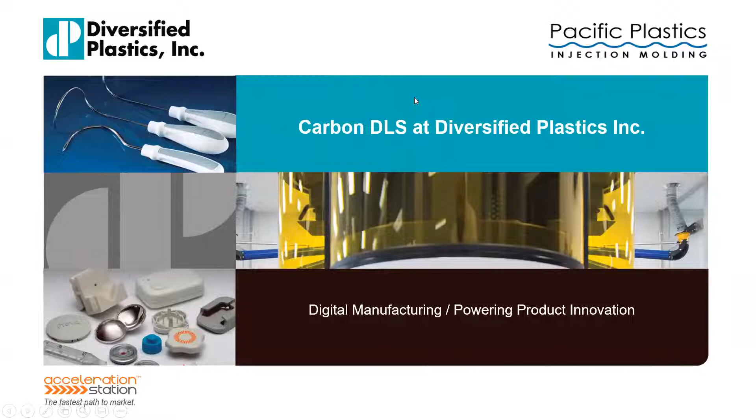Gonna let the music go through here. There we go. So thank you.

What you're going to hear today is, as Steve alluded to, our specific carbon technologies that we've incorporated into a part of our business called Acceleration Station. You're going to hear a little bit from me, and then the vast majority of the content is going to be from AJ Frizzell, our technical support engineer, who really is driving things within the Acceleration Station using carbon technology. So I'm going to cover just a couple of quick things regarding DPI just to lay the groundwork, and then AJ will take it from there.

So AJ, if you could go to the next slide.

A little bit about Diversified. Steve alluded to a Minnesota-based company. We're a custom injection molder. We have two facilities, one in Brooklyn Park here, and then through an acquisition, a facility of another custom molder in Vista, California, near San Diego. You can see on screen almost 80,000 square feet between the two facilities, with clean room technology in our Minnesota facilities.

Also certification with ISO 9001, 13485, FDA, et cetera. And even though medical is a large part of our business, we participate in a number of other industries. The other thing we like to highlight is that Diversified is an ESOP, so employees own 100% of the company. In Minnesota there tends to be a higher predominance of ESOPs, but it's still a unique structure. It's been an ESOP since 2011, and the employees definitely have a piece of the pie, and that does make a difference.

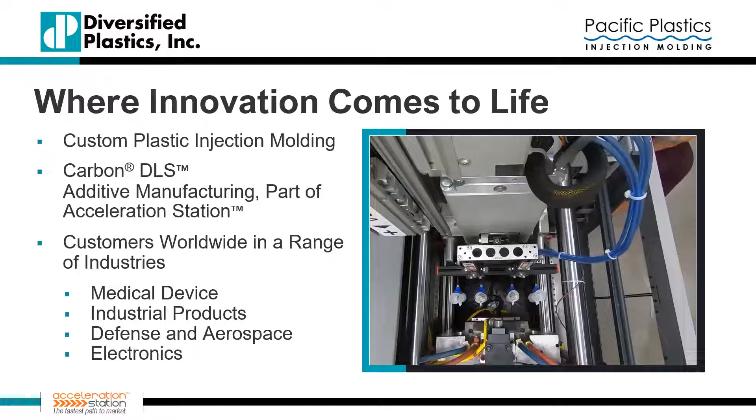As I said, medical device is our primary sector, but we are very involved in a number of industrial sectors, as well as aerospace, defense, and electronics. The next slide is going to be a quick video of Diversified Plastics, and after that AJ will pick up and take you through the carbon DLS technology specifically. So thanks.

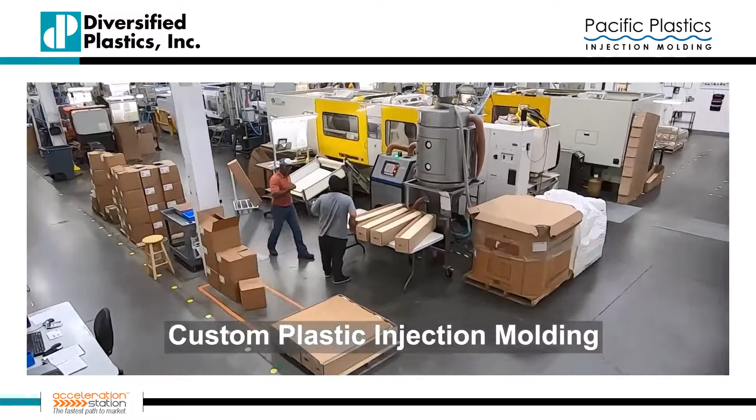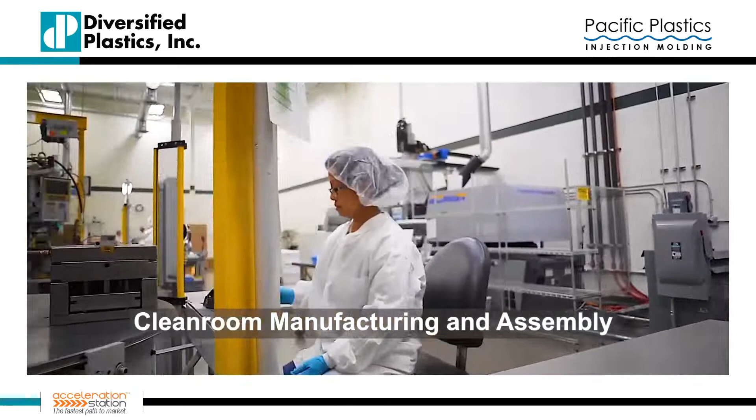All right, thank you Kevin, and hello everybody. My name is AJ Frizzell, technical support engineer here at Diversified Plastics. I'm going to give a brief overview of our relationship with Carbon and then move into the technology, and we'll end with a live demo in our lab here.

At the end of 2018, DPI became the first plastic injection molder to join the carbon production network. Most recently, Carbon awarded us with the distinction of being one of their premier partners. Carbon DLS, our carbon digital light synthesis additive manufacturing, is a cornerstone of our acceleration station, which provides customers with the fastest path to market.

In addition to DLS, our acceleration station services include design for additive manufacturing, inspection under our stringent quality system, clean room assembling and packaging, as well as lot traceability.

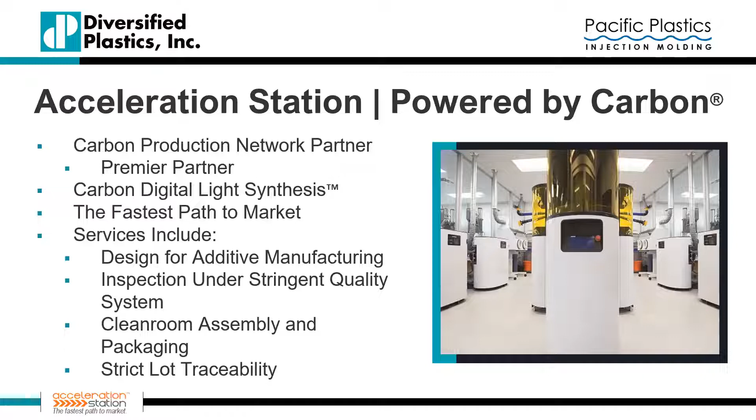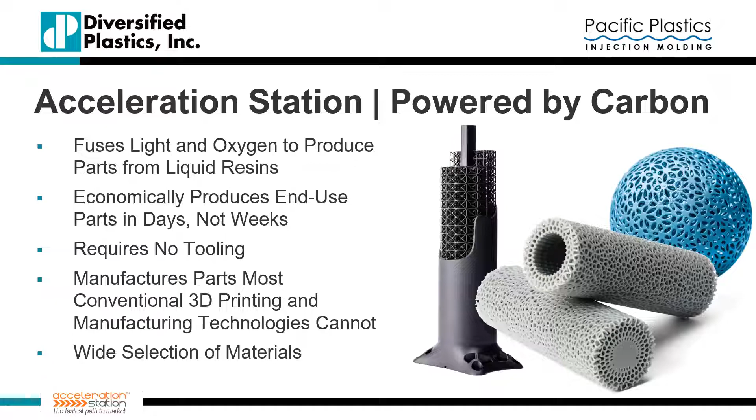Before we dive into design for additive manufacturing, I'm going to provide some information on the carbon digital light synthesis process. Carbon DLS fuses light and oxygen to produce parts from liquid resins. It economically produces end-use parts in days instead of weeks. The carbon DLS process requires no tooling and manufactures parts that most conventional 3D printing and manufacturing technologies cannot. Using this technology, parts can be manufactured from a wide selection of materials. I have another video coming up which will show the carbon DLS manufacturing in action and provide an overview of its benefits.

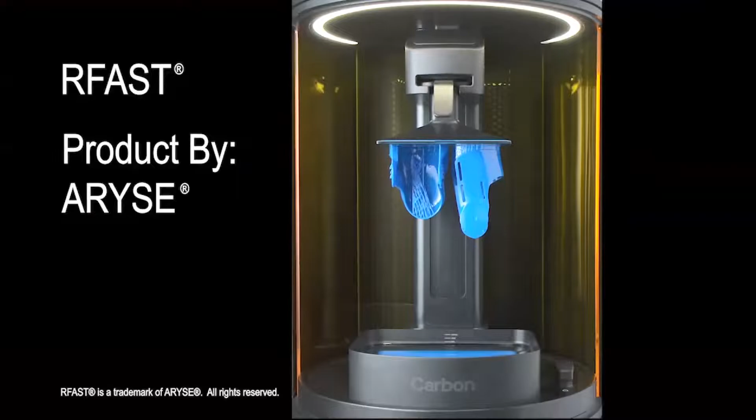Now that you hopefully have a little understanding of the carbon DLS additive manufacturing process, I always like to discuss additive manufacturing design and how it relates to carbon DLS. Not all parts are ideal for the carbon DLS process or traditional 3D manufacturing. Many parts are better suited for manufacturing using plastic injection molding and other conventional manufacturing methods.

But some of the things carbon DLS really excels at is consolidating components together. We can take an assembly and fuse it down into one part, which really helps with assembly time and the actual manufacturing of many different parts. Because carbon DLS eliminates the need for tooling, the process from design to production of end-use parts is much faster and more economical. And it allows rapid prototyping, faster design iterations, with multiple revisions of the same part being printed at the same time, so we can really compare the different rev levels of parts.

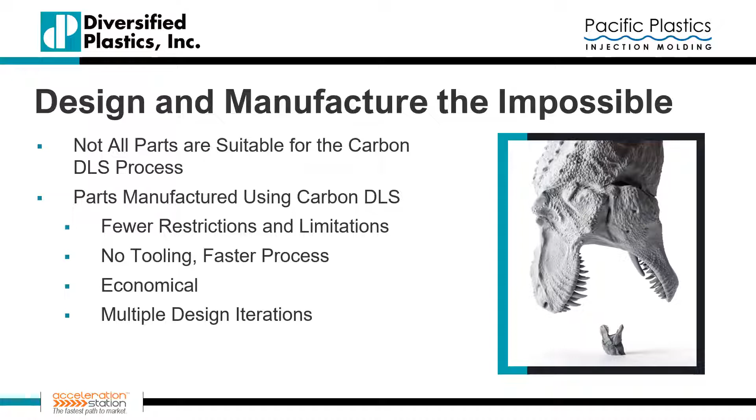Available for decades, traditional 3D printing allows engineers to design more complex geometries. However, high volume and end-use part production has not been practical due to slow printing speeds and limited material selection. Additionally, most 3D printed parts are built in layers that must adhere to one another during printing, and under specific thermal stress and part orientation, these layers may fail, separate, or fail entirely.

And that's where carbon DLS really excels. We can produce complex lattices, we can do surface textures. We really have a lot of differentiation from traditional FDM manufacturing.

And this technology really isn't just for prototyping. It delivers small to large volume production of end-use parts using a wide range of materials with diverse mechanical properties. And thanks to the design flexibility of carbon, engineers are also able to boost quality, strength, stiffness, heat dissipation, and performance.

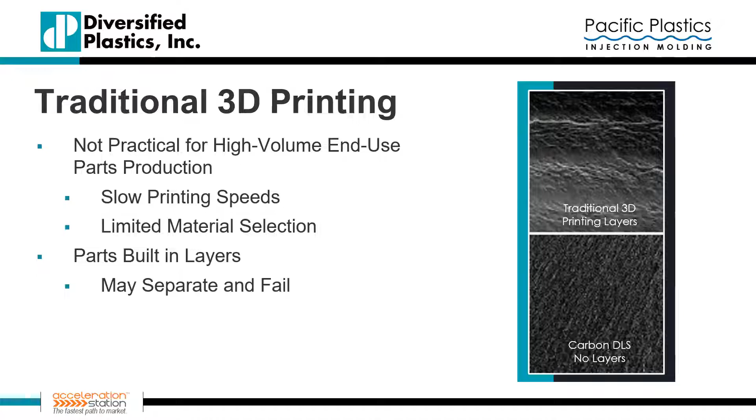This process is much faster than the traditional FDM printing process.

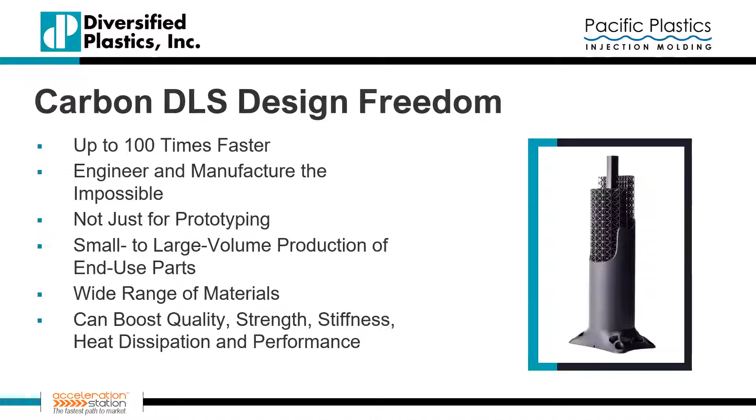We really excel at our material selection. We have about 12 to 16 resins that we get directly from carbon that range from elastomeric to fully rigid. That's really what's driving a lot of our projects — customers focus on a specific material and then move on from there, because we can hit some really unique characteristics, and also hit similar material characteristics to injection molding.

So using carbon 3D printing, we really feel that the design of a part is the most important aspect that allows us to use this technology to its full power.

We use CAD on our injection molding side, but using the power of SolidWorks and putting a full assembly into one STL file, we can print that entire assembly in one part through carbon DLS instead of printing a bunch of specific parts at a similar time.

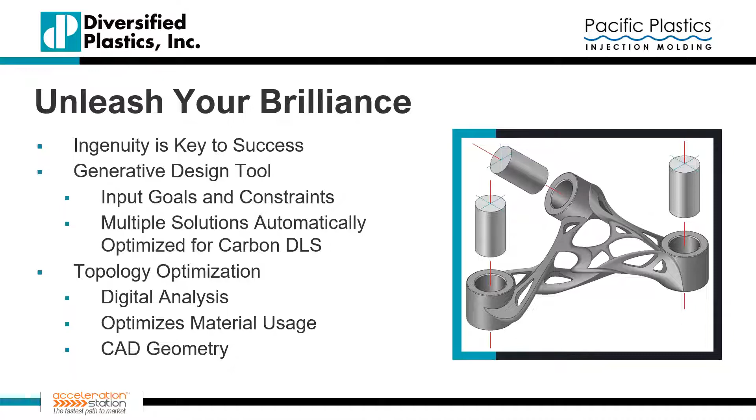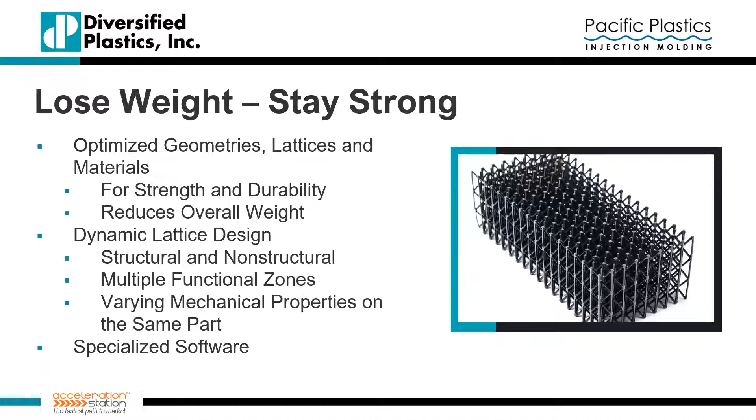We also utilize lattice technology to limit part weight and material consumption. We find that we can hit a lot of the same stiffness and strength capabilities while vastly minimizing the amount of material needed.

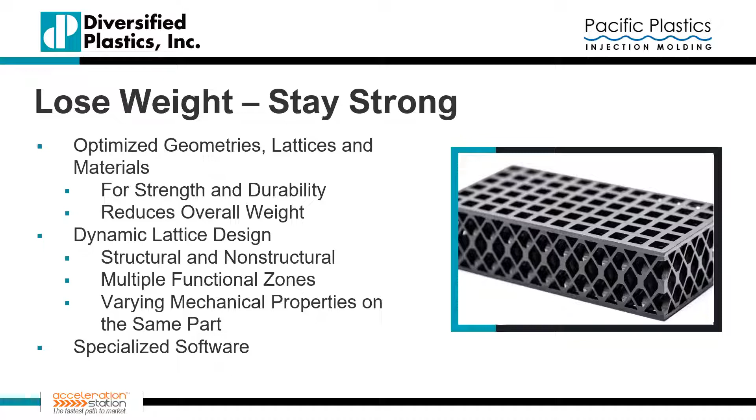And due to our manufacturing process, which I'll get into a little later, the less weight of a part actually increases the print speed layer by layer. That's something carbon DLS really excels at, and another aspect that traditional FDM printing can't hold up to.

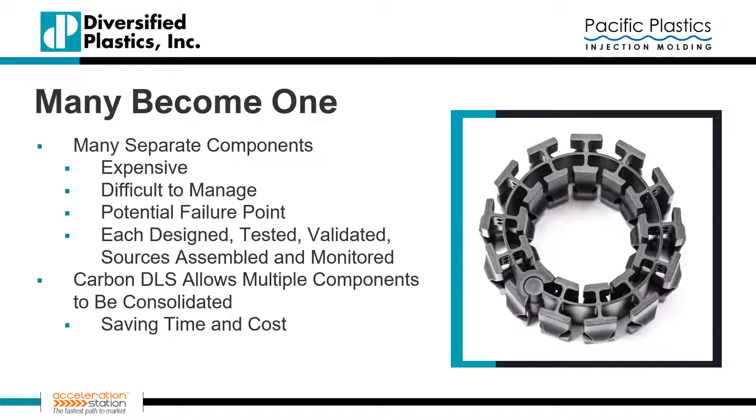A new feature we've been experimenting with a lot in the last year is our texturing ability. We're able to create and recreate some really unique textures on the flat and curved surfaces of our parts. We're finding that people usually spend a lot of time and money putting these textures on molds, but we can do 10 iterations of a single texture, flip back and forth, and find exactly what our customer is looking for.

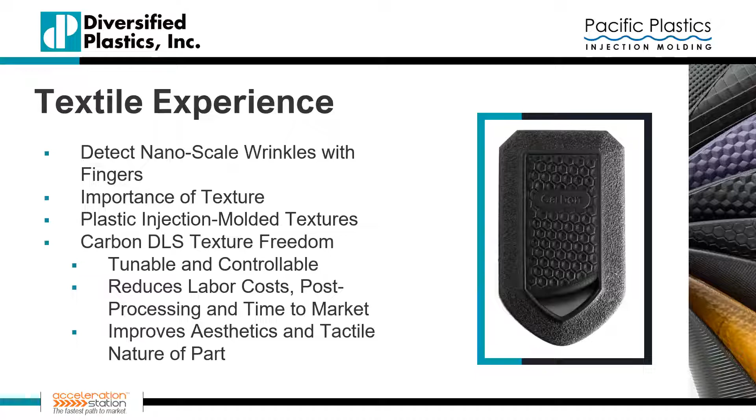Carbon DLS technology does not require molds, which allows for a lot of heavily customized parts. In addition to texturing, we can add serial numbers, which allow us to maintain traceability during intensive prototyping jobs. We can run a serial number through 1,000 different parts, and once that goes into our quality department, we can maintain traceability and inspect all these parts individually.

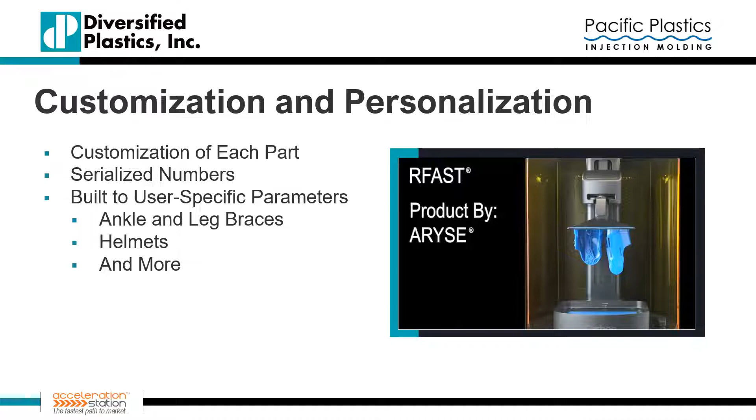I would like to finish up with a case study of a really exciting project that we're working on with Thaddeus Medical Systems.

Thaddeus improves patient care with its iCooler, an active, smart, cold chain packaging solution. The iCooler delivers reliable transport of temperature-sensitive medical supplies and specimens, such as expensive biological therapies, vaccines, blood, and tissue samples. Part of its resilient construction, the iCooler contains design-patented gyroid lattice structures manufactured with DPI's acceleration station, powered by carbon DLS. Here are two pictures of those gyroid lattice structures.

The gyroid lattice components minimize vibration and shock while maximizing airflow in the payload, battery, and sensitive electronic compartments. We found that this exact geometry actually limits a couple different frequencies of vibration, and we're finding lots of practical uses for that.

During prototyping, the Thaddeus team found that the complex lattice was impossible to manufacture with traditional 3D printing methods, and Diversified Plastics was the only supplier to successfully produce gyroid lattice parts. We printed samples with different lattice sizes and material options, and found that this SIL 30 material, one of our cache of materials, hit everything that they needed for performance.

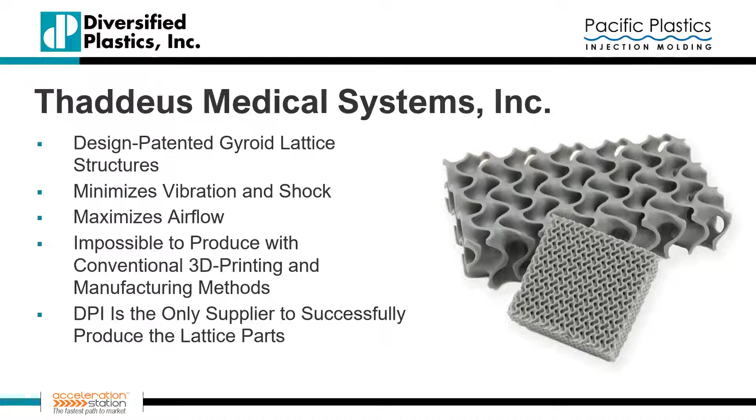This cooler will be initially available in 2 sizes and has a substantial market potential, and they're actively in beta testing right now with a couple of various institutions.

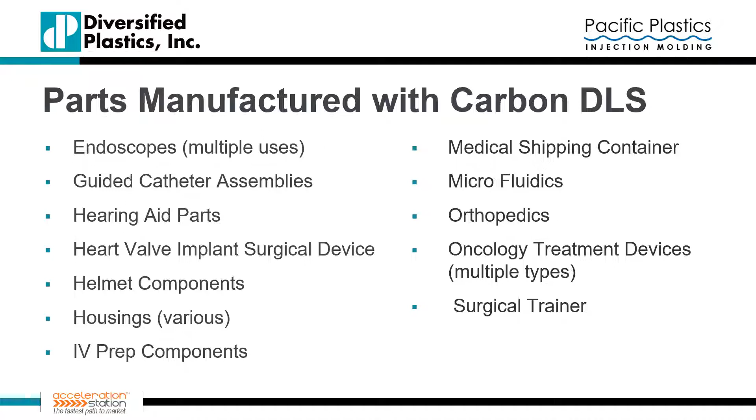So these are some examples of parts that we're currently working on or have worked on, and it's really up to a designer's imagination how to utilize this technology. Additive manufacturing has been around for 20 years, but I really believe we're still scratching the surface on finding all the unique uses for this technology, because we aren't limited by the normal limitations of manufacturing.

All right, so I'm going to start my video here and show you guys our acceleration station lab in Diversified Plastics. All right, I'm going to stop sharing as well here too, which should make my screen bigger. Hello, everybody.

All right, so we're in the acceleration station lab here. We have a circular workflow of how we go through the steps to use these carbon 3D printers. First step behind me here is our dispensing station. The resin comes in cartridges, either 1-to-1 or 5-to-1 resins, except for one resin that we have. So they have to be dispensed properly through a mixing straw, as you can see here, which throughout the length of the straw, the 2 resins mix together and then form our in-use resin.

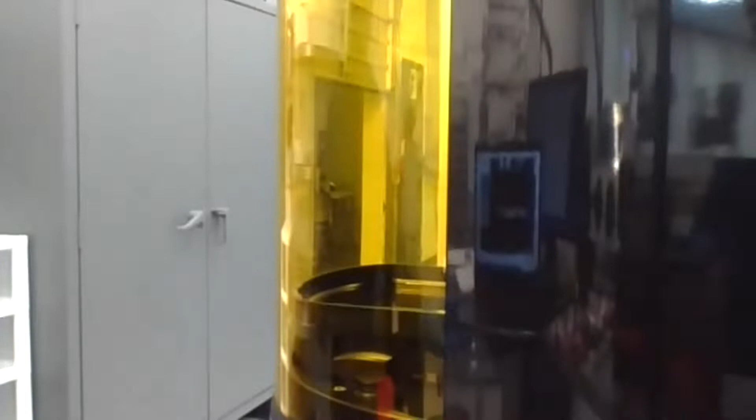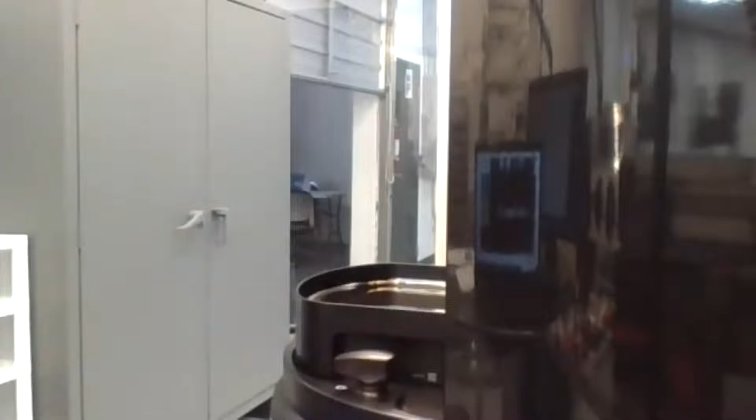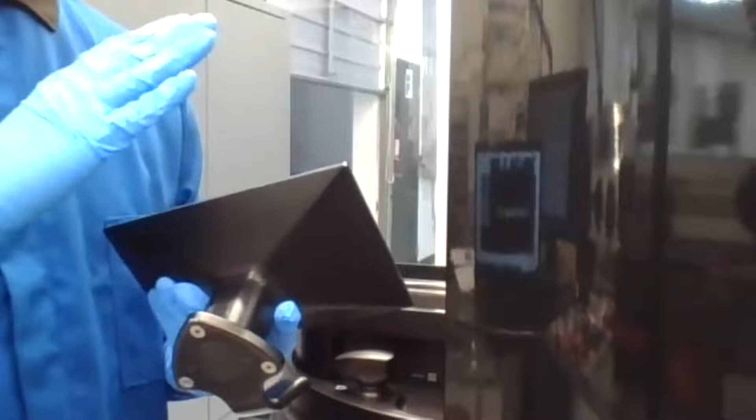So we dispense into cassettes. I have one in my printer here already, and you can see that. So once this cassette is inside the printer, we lock it in and we add a platform which has an RFID chip in it, which tracks all the information for the actual print. We find this really useful because that information will follow the print through all the different steps of our production.

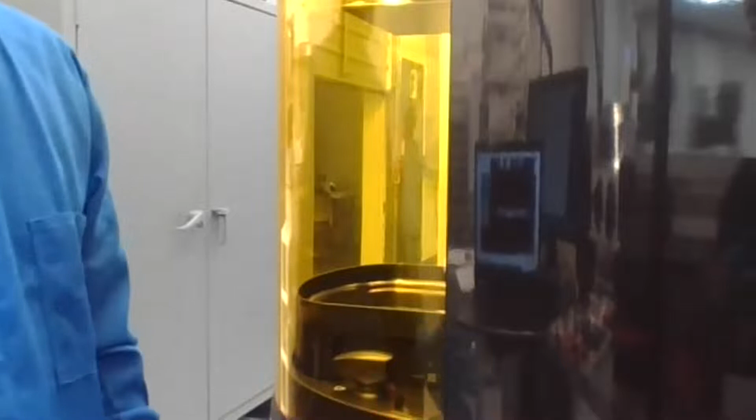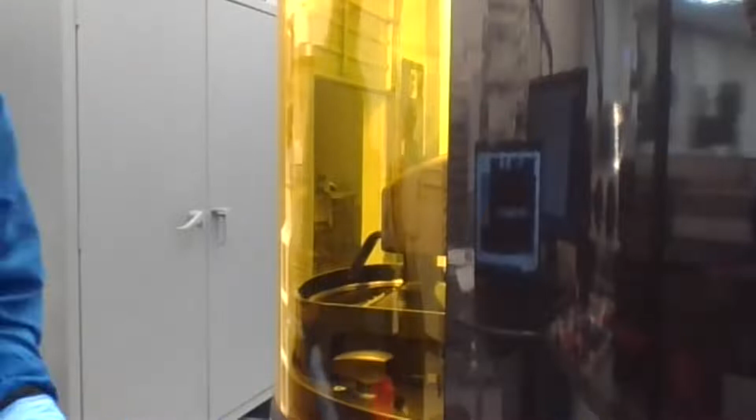We add our specific geometries and sliced files to these printers through Wi-Fi. And then, now I have a print ready to go. I can hit the start button. This print, as you can see here, this platform's coming down. It'll take a second for the first layer to start, but as each layer pulls up, resin flows underneath, and then the printer will come back down and grab a second layer. Usually we find prints are in the 1,000 to 3,000 layers range. A lot of the time when we're trying to maximize efficiency, we're trying to limit the height on prints and utilize the full horizontal area of our build platform, which allows us to nest a lot of parts in there. Having one long vertical part is going to be more expensive and less efficient in terms of time and material. So, yeah, this print will probably go for a couple hours here.

And then what I'm going to do right now is stop my screen, move my computer to a different location, and show you a print that's in process.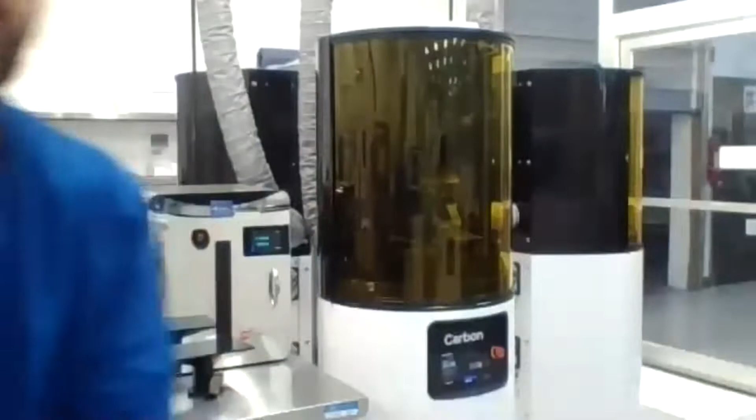Bear with me for 1 second here. All right, so I moved across the lab here. This is another print that we started earlier in the day. And we can see that this platform has elevated off, each of those layers grabbing and adhering to the bottom.

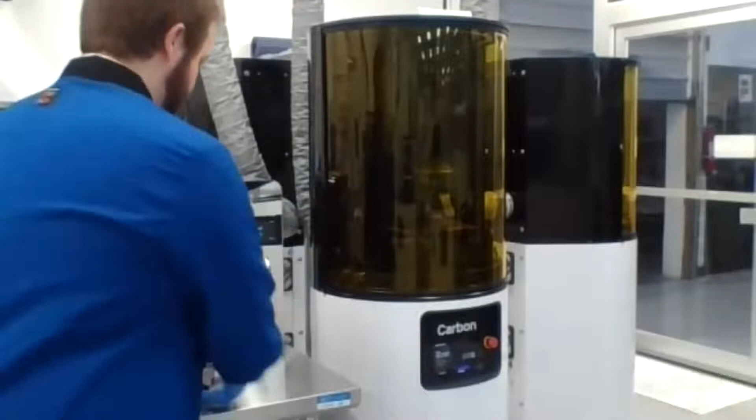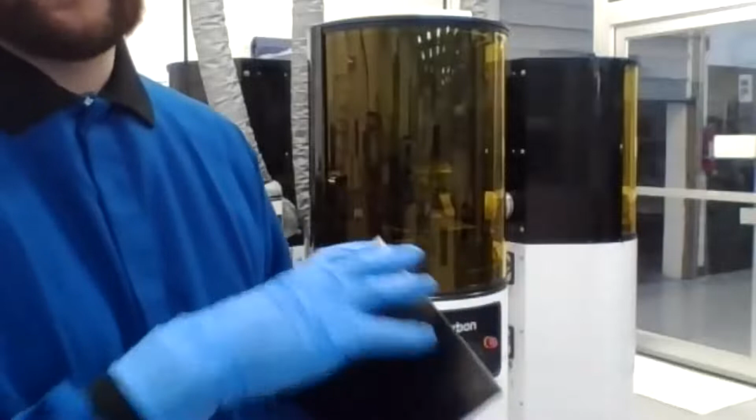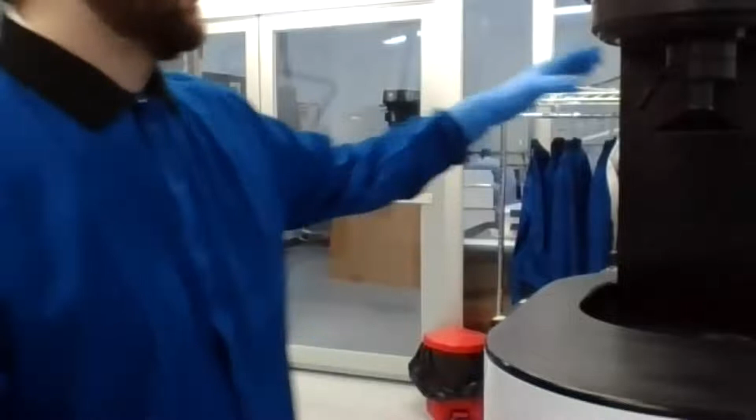So when this print finishes, we will have it connected to the bottom of one of our platforms, and there will still be liquid resin, uncured, covering the bottom of this platform and the entire geometry on the part. So what we do then is we move to another Carbon product, a smart part washer. We'll open this up, place our platform inside. And like I discussed earlier, the RFID chip here holds all the information for the specific wash that we need for the specific geometry from our printer.

So I would go here and hit a certain wash cycle that we have. We have different wash cycles for different materials and geometries. If we have a bunch of really small, thin parts on the top of the platform, it'll be a less rigorous wash than if we have a large piece of geometry.

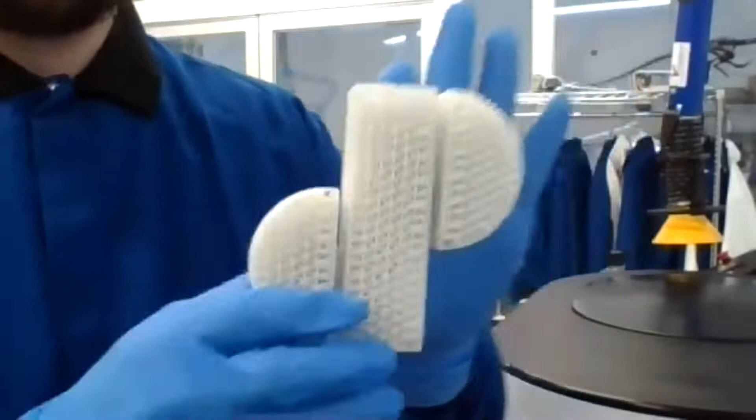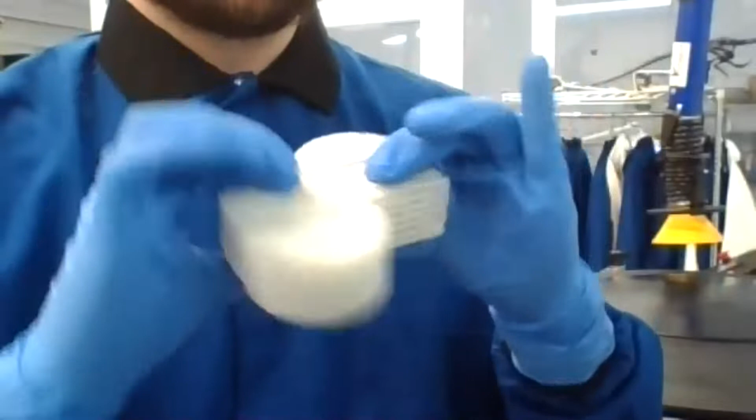I'll show you an example of something we printed just this morning, which is our logo, but printed in a lattice. So again, what I covered in my presentation earlier allows us to make a cool design, but more importantly, limit the amount of material needed to print something in this shape. This is a rigid material, and we find it still holds up to a lot of the strength requirements based on the actual pattern of our lattice.

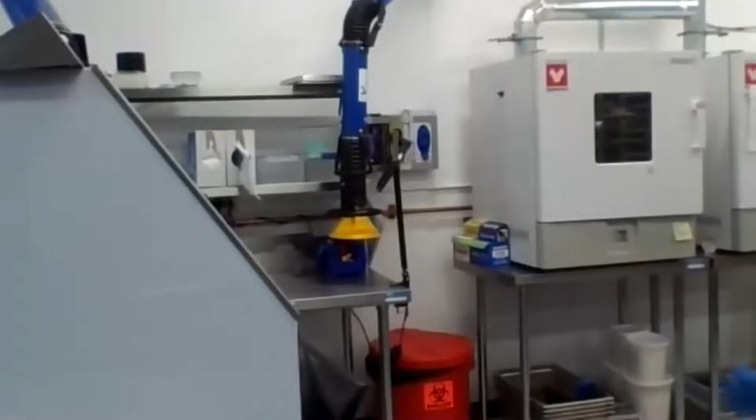So a part would come out of the smart part washer with all of the uncured liquid resin removed from it. Then we bring it over to another station where we remove all the supports and finalize the part. If there's an unsupported angle or something that needed a support structure so we weren't printing on an overhang, we'll remove those here.

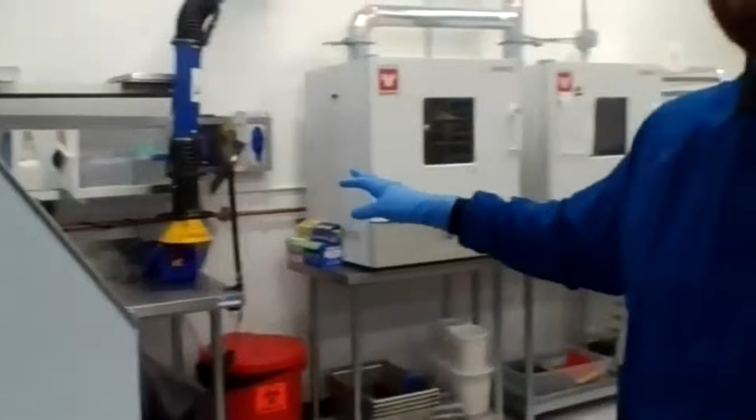And then we move to our two ovens here. All of the carbon one-part resins, one-to-two part resins, and five-to-one part resins are all a two-step cure. The first cure actually happens in the printer, where light comes through that oxygen-permeable membrane and hardens up the resin, but we still consider that the green state. Once we take our parts and put them into the oven, that's when we really see that strength come out—that's the final cure.

Unlike other 3D printing practices, all of those layers we print layer by layer are actually fusing together on a molecular level. That's how we can provide really smooth surfaces as well as some really strong end-use parts. So I know I probably breezed through that quickly, but that's a very quick overview of our workflow and how we actually produce these parts in Carbon DLS.